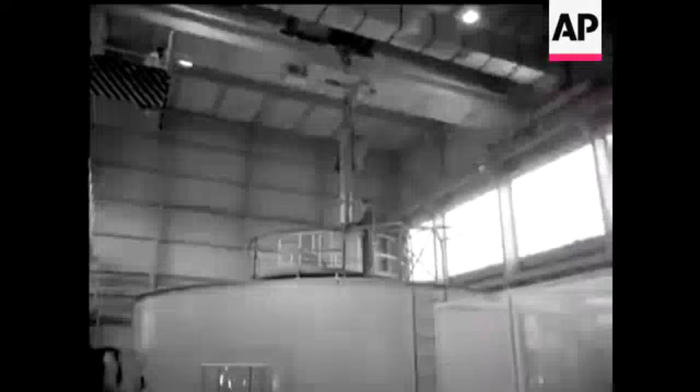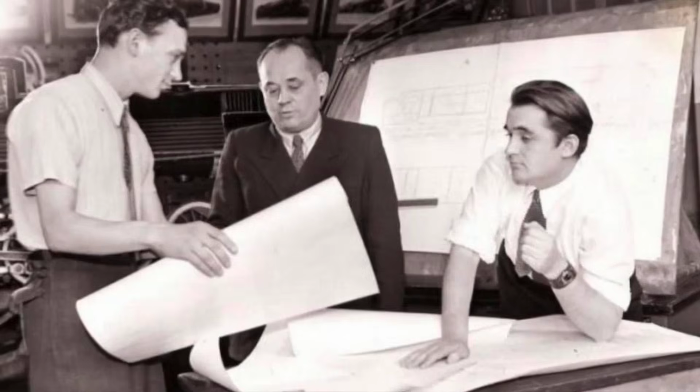The Atomic Energy Commission's public campaigns filled magazines and newsreels with visions of limitless, clean energy: reactors lighting cities, powering ships, and even propelling trains across the continent. This was an era when the boundaries of engineering seemed to dissolve overnight. In government labs and corporate boardrooms, nuclear power was treated not as a fantasy, but as the next logical step for nearly every form of transportation.

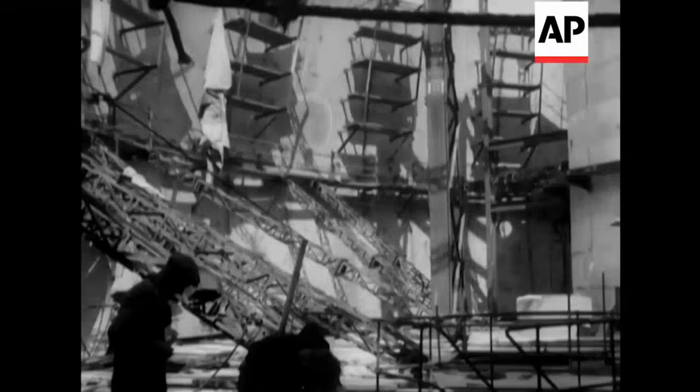The Atomic Energy Commission encouraged inventors to think big, offering technical guidance and, in some cases, access to subsidized uranium. Trade journals speculated about atomic-powered airplanes and merchant ships, while engineers from General Motors and Westinghouse began to sketch out the possibilities for railroads. Rail executives watched as nuclear submarines slid into the water, and the keel was laid for the NS Savannah, the world's first nuclear merchant ship.

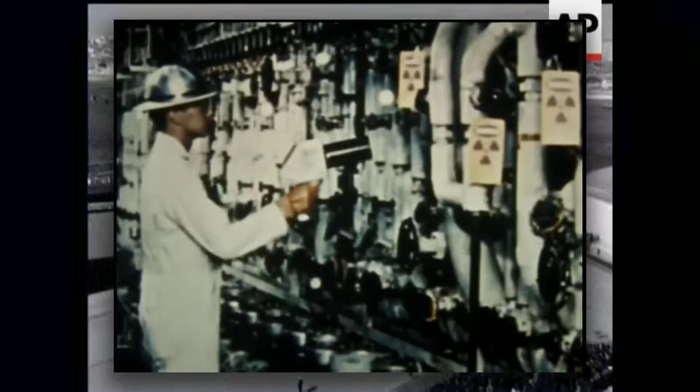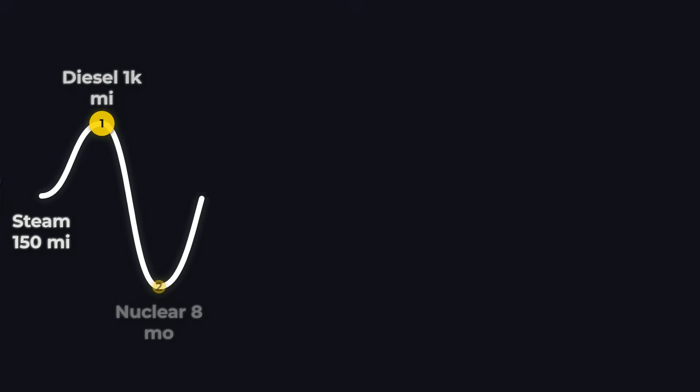The message was unmistakable: if reactors could operate safely beneath the waves and on the high seas, why not on steel rails? The Association of American Railroads, eager to be seen at the forefront of progress, lent its support to feasibility studies. The idea that a locomotive could run for months without refueling, immune to the price swings of coal and oil, fit perfectly with the spirit of the age.

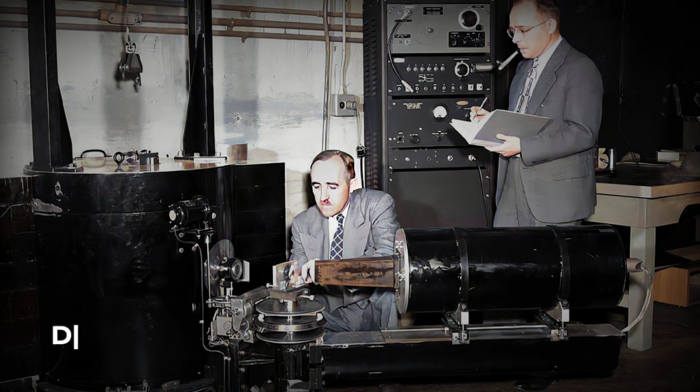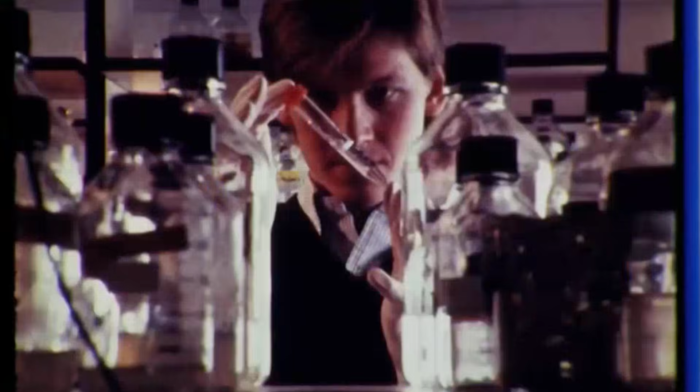In this climate of boundless atomic optimism, the stage was set for the X-12 and its promise to rewrite the rules of railroading. Dr. Lyle Borst, a physicist at the University of Utah, stepped forward as the most determined advocate for the nuclear locomotive. By 1951, Borst had gathered a small team of graduate students to tackle what seemed at the time a solvable engineering challenge: harnessing atomic power for rail.

He brought a reputation forged at Brookhaven and Oak Ridge, and his proposal quickly caught the attention of the Association of American Railroads, abbreviated AAR. The AAR saw in Borst's idea a chance to leap ahead of both foreign rivals and domestic competitors, so they agreed to sponsor a formal feasibility study.

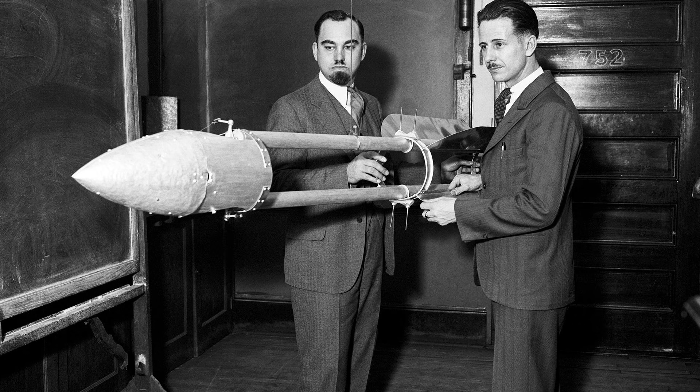General Motors and Westinghouse, both eager to stake their claims in the atomic future, offered technical assistance for the study. While neither company committed to building a prototype, their engineers contributed calculations and design reviews, lending the project a degree of credibility that pure academic speculation could not provide.

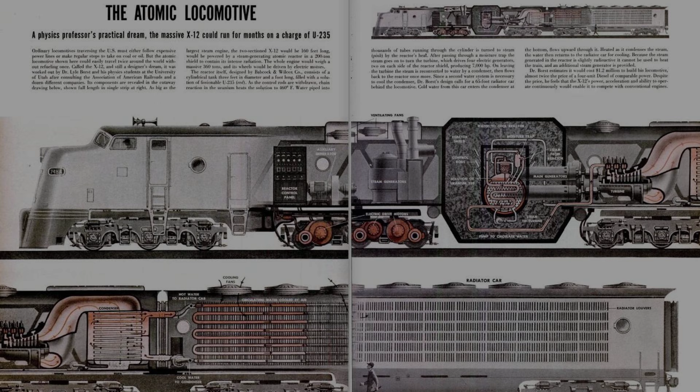The study, running from 1954 through 1957, became the most comprehensive attempt to map out how a nuclear-powered locomotive might actually work. Borst's concept was ambitious: a 160-foot articulated machine weighing 360 tons, designed to house a uranium-fueled reactor, a steam turbine, and electric traction motors capable of delivering up to 8,000 horsepower. The heart of the design was a 200-ton lead shield to protect the crew from radiation, and a dedicated radiator car to manage the enormous waste heat.

Babcock & Wilcox, already a leader in reactor technology, was tapped for the core design. Borst's team calculated that, with government-subsidized uranium, the locomotive could run for months without refueling, a tantalizing prospect for an industry dependent on costly and volatile fuel supplies.

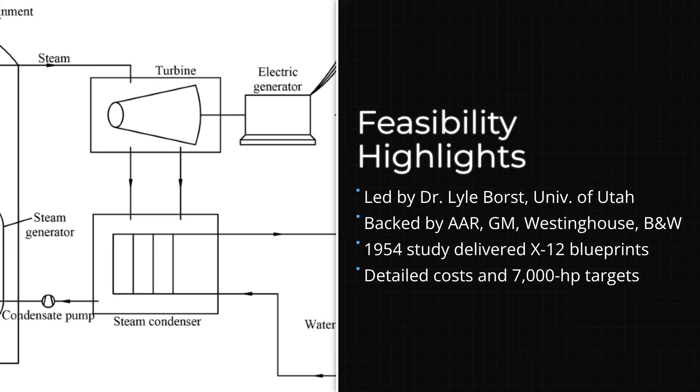Between 1954 and 1957, the feasibility study produced technical blueprints, cost estimates, and performance projections. Yet even as the numbers were tallied and the diagrams refined, the limits of the era's engineering began to surface. The X-12 remained a concept, but for a brief window it stood at the center of serious industrial debate, its backers certain that atomic power could transform the rails as surely as it had changed the world's navies.

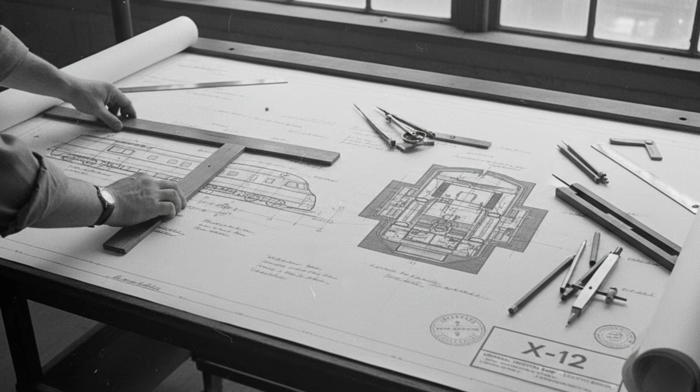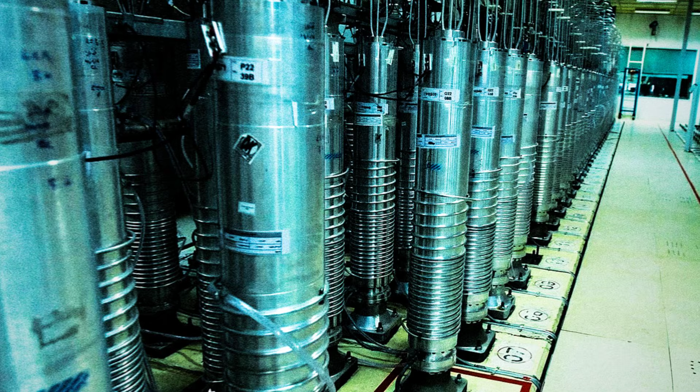The X-12's blueprint rested on a simple but radical premise: replace the diesel engine with a compact nuclear reactor and let atomic energy drive the train for months without stopping. At the core of the design sat a small, pressurized water reactor fueled by highly enriched uranium-235. The reactor's job was to heat water directly, producing high-pressure steam.

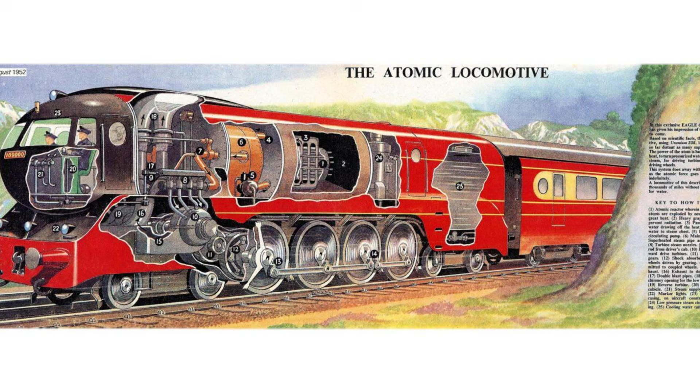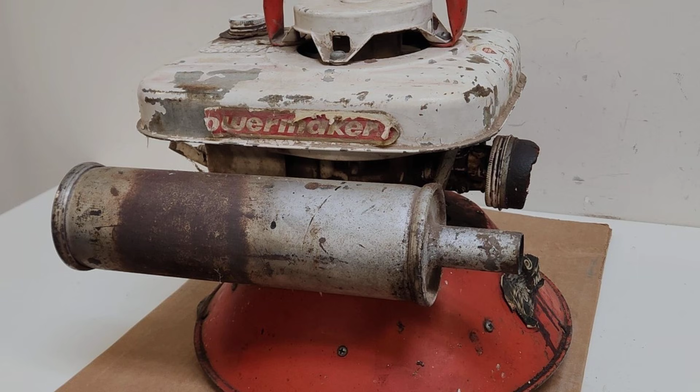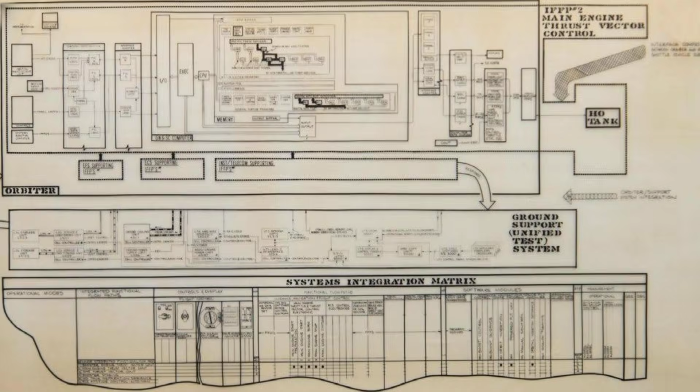This steam would then flow straight into a condensing steam turbine mounted just behind the shielded compartment. Instead of turning wheels mechanically, the turbine spun a set of 4 compact generators, each about 2 feet wide. Electricity from these generators powered traction motors mounted on 9 axles under the engine car, and 3 more under the radiator car, forming a turbine-electric setup reminiscent of the diesel-electric locomotives then conquering the rails. The entire power chain was laid out to maximize efficiency and minimize stops.

With about 11 pounds of uranium on board, the X-12 could, in theory, operate continuously for 2 to 3 months before requiring a refuel, an interval unheard of in conventional railroading.

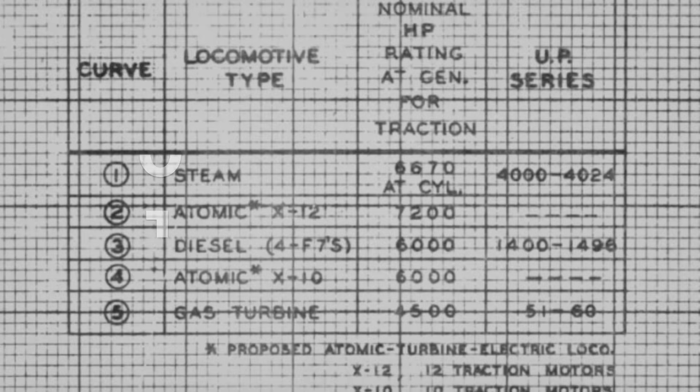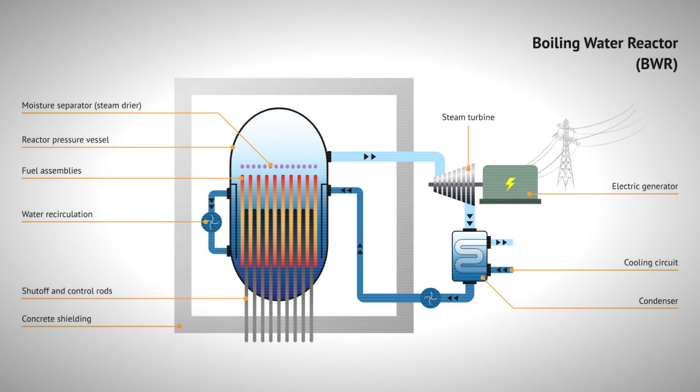The locomotive's normal output was rated at 7,200 horsepower, with the turbine itself capable of surges up to 11,000 horsepower for brief periods of acceleration. Because the reactor produced steam directly, there was no need for the water tenders or the massive coal bunkers that defined earlier steam giants. The radiator car, stretching 60 to 65 feet, handled waste heat with banks of fans and radiators.

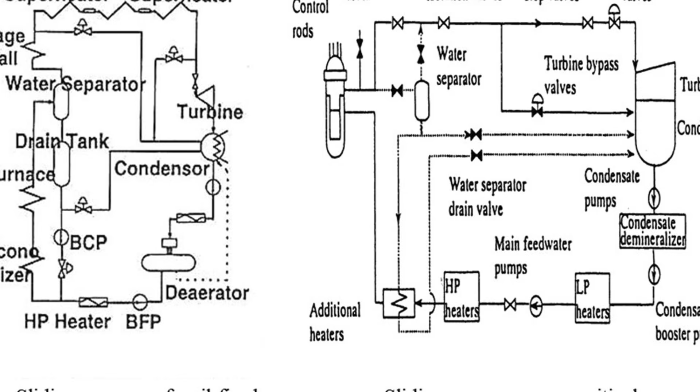Every engineering choice in the X-12's design aimed to harness the promise of atomic endurance. The direct steam cycle cut complexity and weight, while the articulated frame distributed mass across more axles. For a short window in the 1950s, it seemed plausible that a train could cross the continent without ever pausing for fuel, guided by nothing but the steady pulse of a nuclear core.

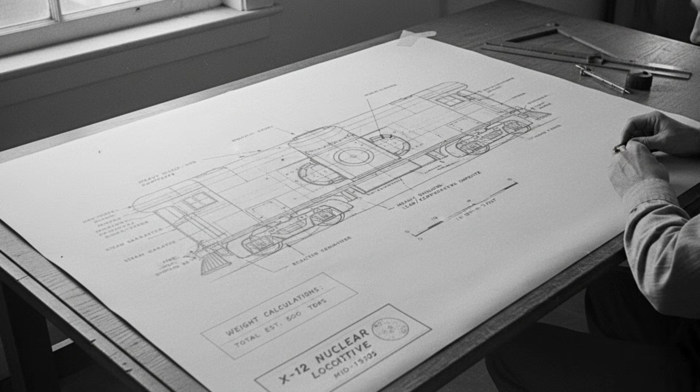Railroad engineering has always been a contest between ambition and the hard limits of physics. For the X-12, those limits arrived in the form of weight, specifically the enormous burden of radiation shielding. The locomotive's reactor core, though compact by nuclear standards, demanded protection from every side. Early calculations by Dr. Lyle Borst's team called for a lead shield weighing nearly 200 tons, more than the combined mass of 2 fully loaded diesel locomotives.

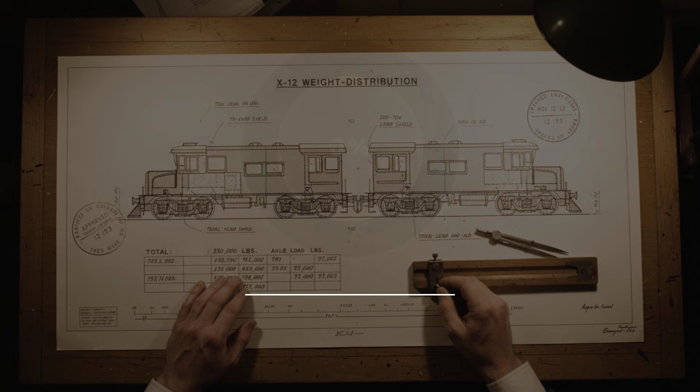This was not a luxury, but a necessity. Without it, the crew compartment would have been uninhabitable, and the risk to anyone nearby would have been unacceptable. The shield alone accounted for more than half of the X-12's total weight, which reached an estimated 360 tons across its 2 articulated sections.

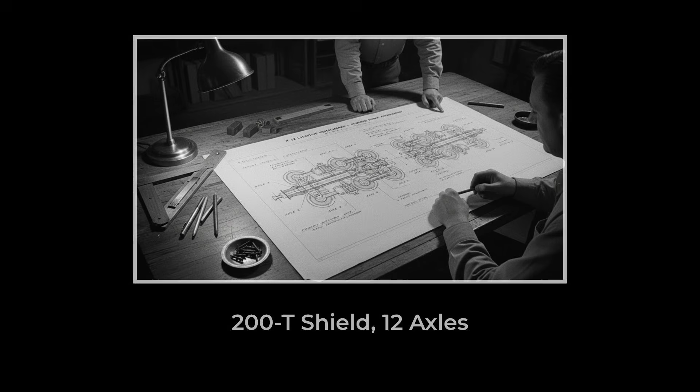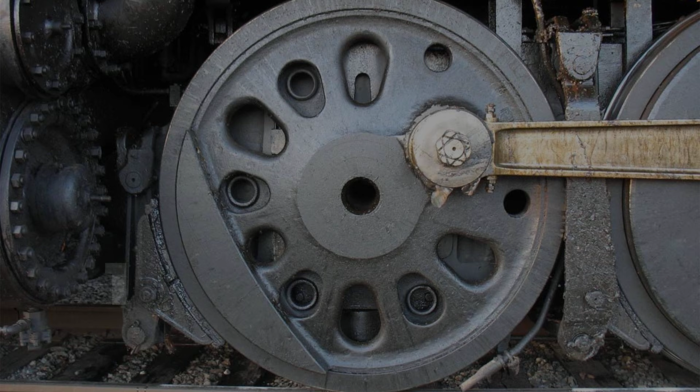This figure dwarfed anything then running on American rails. For comparison, a standard EMD F-7 diesel-electric tipped the scales at just 120 tons, spread over 4 axles. The X-12, at 3 times that weight, required 12 powered axles simply to distribute its load without crushing the rails beneath it. Even with this arrangement, axle loads approached the very edge of what North American mainlines could tolerate, about 30 tons per axle, a threshold that left little margin for error.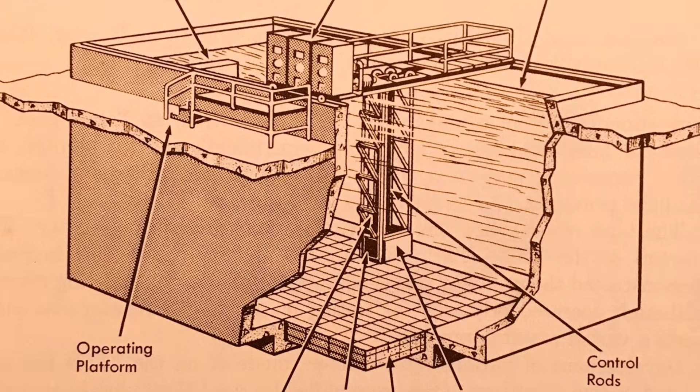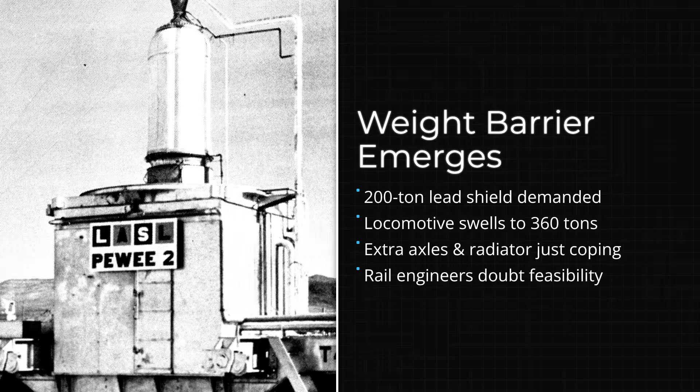This mass was not just a matter of heavy machinery. It was a direct consequence of the physics of radiation. Every inch of shielding added safety, but also added weight, pushing the design further from practical reality. The articulated frame, the extra axles, and the elongated radiator car were all attempts to spread this burden, but none could erase the fact that the locomotive's mass would stress bridges, tracks, and maintenance facilities far beyond their intended limits.

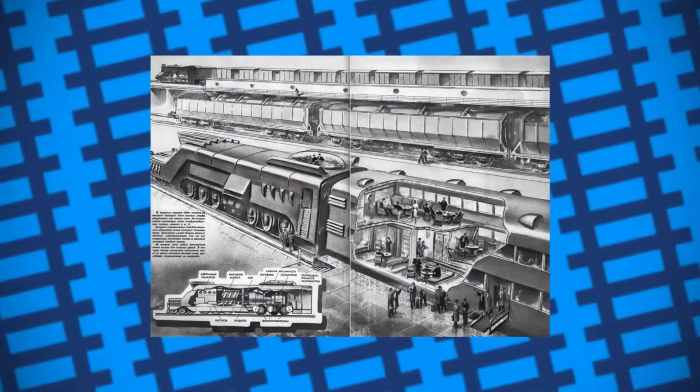For rail engineers, the numbers on the page spelled trouble, a train that could run for months without stopping, but might never be allowed to leave the yard. The promise of atomic propulsion collided head-on with the realities of steel and stone, and the X-12's blueprint began to look less like a roadmap to the future and more like a warning about the limits of technology.

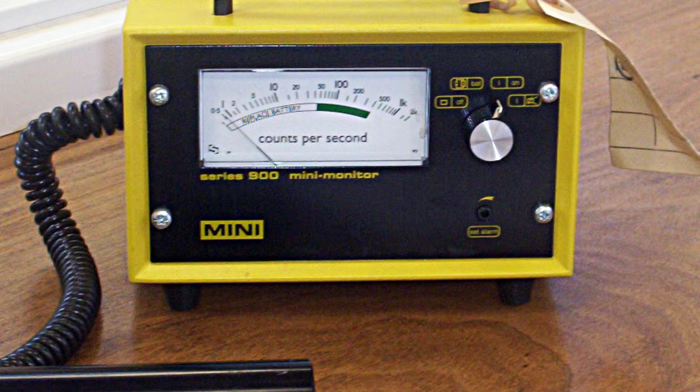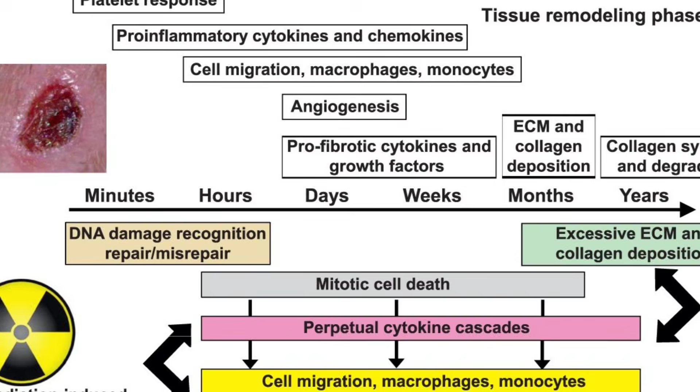Radiation is invisible, but its effects are measurable, and for anyone working near a nuclear reactor, impossible to ignore. In the 1950s, the Atomic Energy Commission set a strict occupational exposure limit, 5 rem per year, for whole-body radiation. This number was not arbitrary. It reflected a growing understanding that even low doses, accumulated over time, could damage tissue, suppress immune systems, or increase the risk of cancer. For the X-12, every design calculation had to answer the same question: how do you keep the crew and everyone nearby below that threshold?

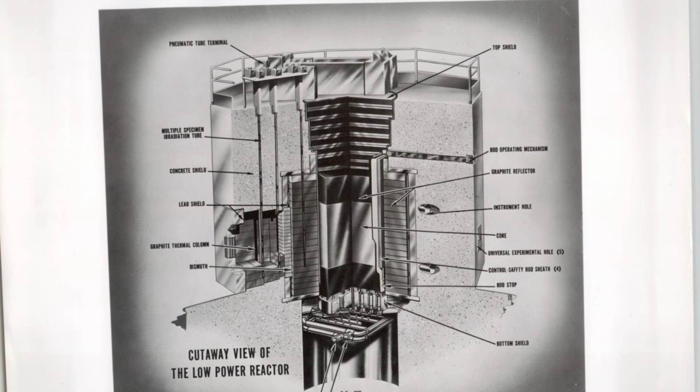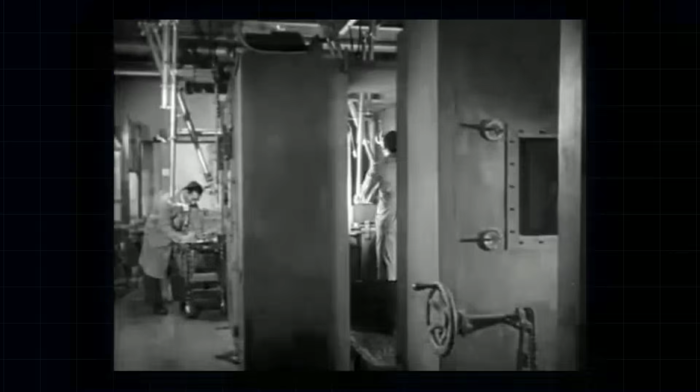Inside the locomotive, the reactor core would have emitted powerful gamma rays and neutrons, both capable of penetrating steel and concrete. The proposed solution was a 200-ton lead shield wrapped around the core and stretching between the crew compartment and the reactor vessel. But shielding was not perfect. Any gap, any flaw in the assembly, could allow radiation to leak into the cab. Even with the best materials, some exposure was inevitable.

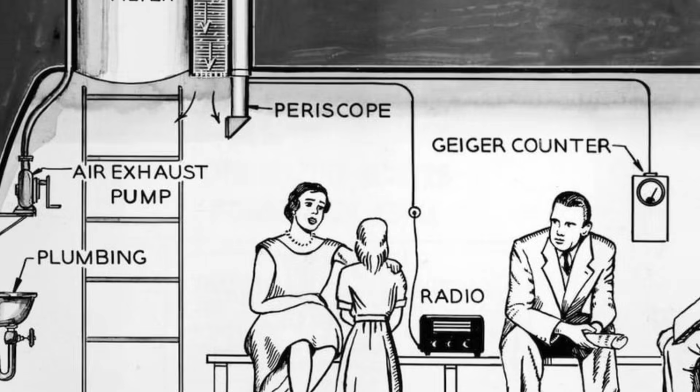Health physicists ran dose calculations for every scenario, including normal running, maintenance stops, and emergencies. Their models showed that at typical distances, a well-designed shield could keep crew exposure near, but not always below, the 5 rem annual limit. The closer you stood, the greater the risk.

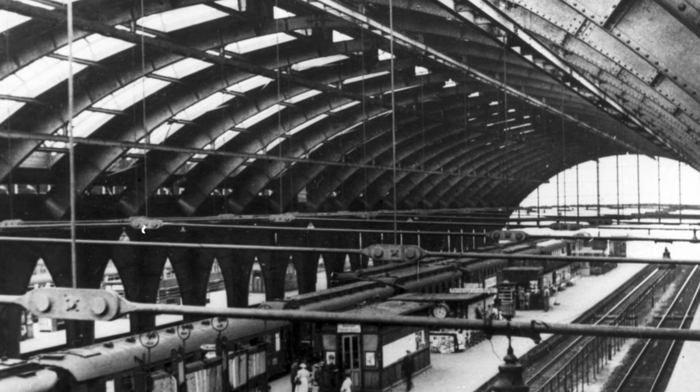The problem did not end with the crew. Railroads run through towns, past schools and neighborhoods, and along busy platforms. If the X-12 paused at a station or rolled slowly through a city, stray radiation could reach bystanders on the platform or people living near the tracks. The risk was not just theoretical. Even a small, persistent leak could add up over time, especially for workers who loaded cargo or serviced the train.

The 5 rem standard was meant to protect workers, but the public had no such buffer. This turned what started as an engineering challenge into a moral dilemma. How much risk could be justified in the name of progress? For the X-12, the answer was never clear enough to move forward.

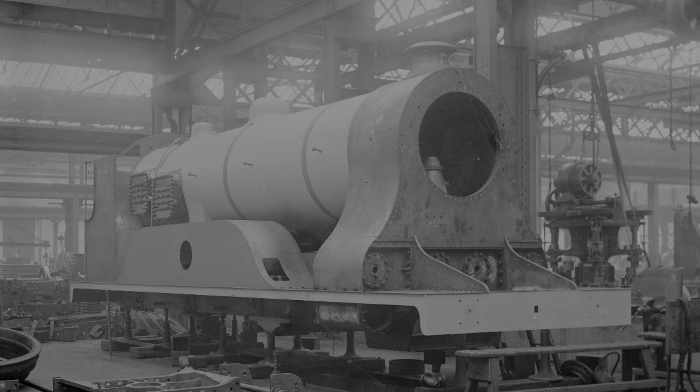Shielding a nuclear reactor on rails meant more than just piling on mass. It forced engineers into a maze of hard choices. Lead, dense and malleable, offered the best protection per inch, but it came with a staggering weight penalty. Borated water, used in some naval reactors, absorbed neutrons efficiently, yet it required heavy, leak-proof tanks and constant monitoring. Concrete, the standby for stationary power plants, was simply too bulky for a moving vehicle.

Each material promised safety but threatened practicality, and no blend could erase the fundamental problem. Every pound of shielding added to the locomotive's burden, pushing axle loads to the brink of what the track could bear.

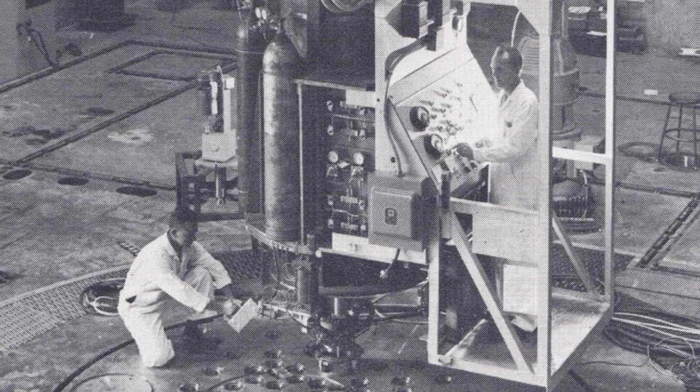The shielding dilemma spilled beyond the locomotive itself. Refueling and maintenance required a facility unlike any standard rail yard. Servicing a nuclear engine meant more than swapping out parts or topping off fluids.

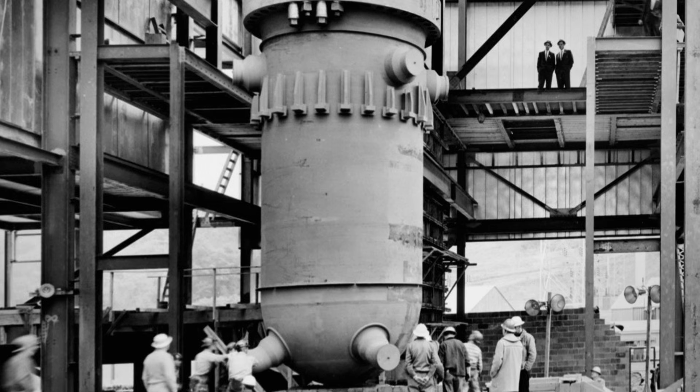The entire reactor compartment, still hot with residual radioactivity, would need to be handled inside a hardened depot modeled after the containment buildings of power plants. These depots had to be remote, with thick walls and controlled access, equipped for everything from fuel transfer to shield inspection.

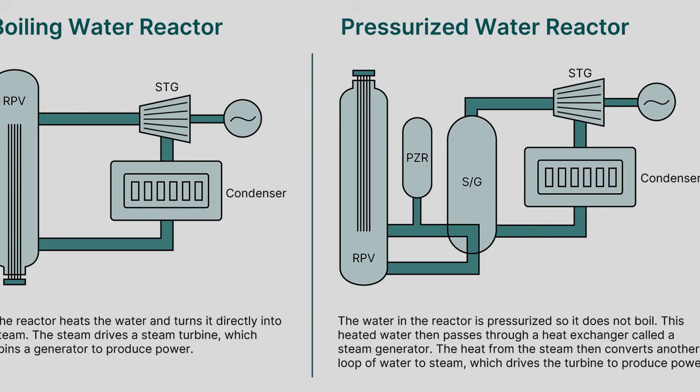Every tool, every surface, had to be monitored for contamination, and spent fuel demanded secure storage until it could be safely transported away. Routine maintenance, a daily reality for diesel engines, became a logistical puzzle for the X-12. The direct cycle design meant that turbines and piping exposed to radioactive steam could not be serviced in the field. Components would either be left untouched for years or swapped out entirely by teams trained in radiation safety, working behind barriers, or with remote manipulators.

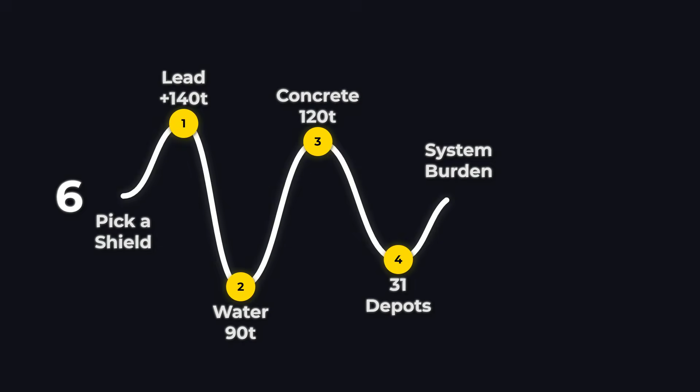Even minor repairs required planning that rivaled a nuclear plant's outage schedule. This system-wide complexity changed what it meant to operate a locomotive. The X-12's promise of endless range hit a network of specialized depots, hazardous material protocols, and a maintenance regime that stretched far beyond the rails.

Shielding was not just a technical detail, it was a burden that rippled outward, touching every aspect of railroad operations and raising the stakes for what could happen if anything went wrong. A nuclear locomotive derailing at speed posed a nightmare scenario that engineers struggled to quantify.

Impact modeling from the period suggested that, at 60 miles per hour, the forces unleashed in a major crash could compromise the integrity of the reactor vessel, especially if the train struck a bridge abutment or jackknifed into a ravine.

While the X-12's design called for a thick, 200-ton lead shield and an automatic reactor shutdown on collision, containment was never absolute. Early estimates placed the probability of a catastrophic breach in a high-speed derailment somewhere between 1 in 1,000 and 1 in 10,000, a low number, but not zero.

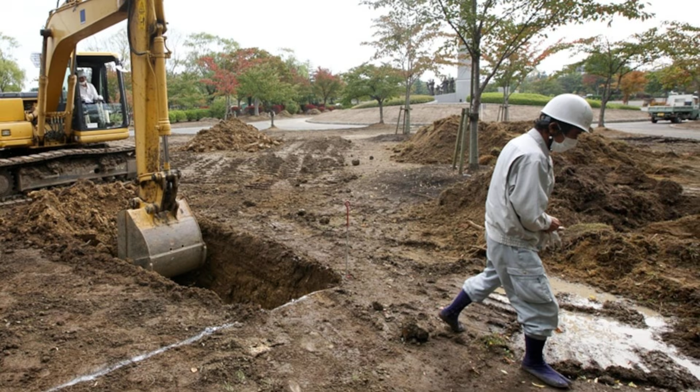In the event of a rupture, radioactive steam and contaminated water could be vented directly into the environment, spreading across trackside neighborhoods and farmland. Emergency planners calculated that cleanup would require cordoning off miles of track, evacuating entire communities, and removing tons of contaminated soil, an operation measured in years, not weeks.

The sheer scale and cost of such a disaster forced railroads and regulators to confront the unthinkable. One accident could turn a routine freight run into a radiological crisis, stretching far beyond the rails.

By 1954, the numbers on the X-12's balance sheet told a story no rail executive could ignore. The projected cost to build a single nuclear-powered locomotive stood at $1.2 million, twice the price of a 4-unit diesel set with similar hauling power.

For railroad chief financial officers, that was only the starting point. Each X-12 would demand a custom-built reactor core, a 200-ton lead shield, and a specialized maintenance regime, costs that ballooned far beyond the sticker price.

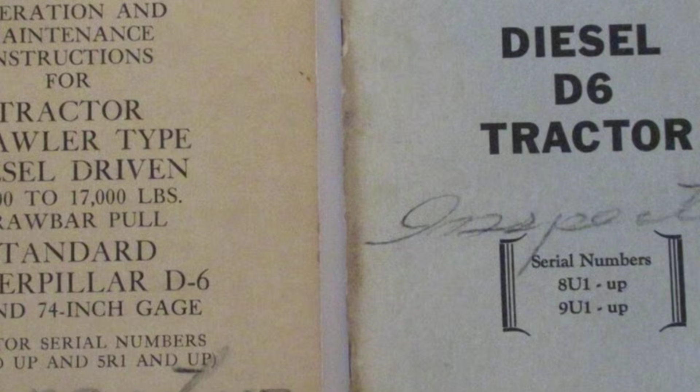Operating expenses added another layer of uncertainty. While uranium-235 fuel was theoretically subsidized, its price was both classified and unstable, and the logistics of sourcing and handling nuclear material introduced expenses that no diesel fleet manager had to consider.

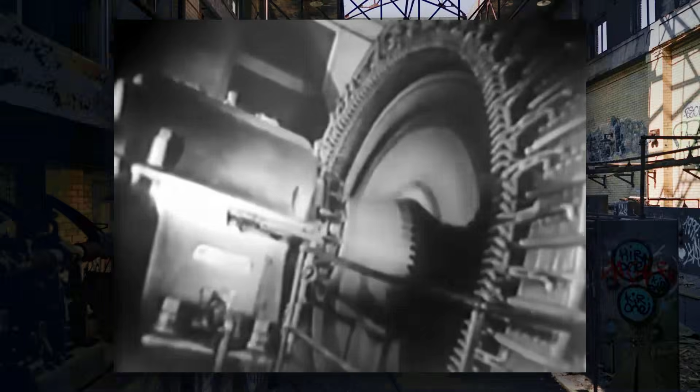Insurance companies, faced with the prospect of a mobile reactor crossing state lines and running through cities, balked at providing coverage. Premiums, where quoted, approached sums that would wipe out any long-term savings from reduced refueling. Even before the first prototype was built, the X-12's financial burden had outpaced any promise of atomic efficiency.

For a railroad industry already investing heavily in proven diesel technology, the nuclear locomotive was simply a bet too risky to place. By the late 1950s, the American railroad industry was already in the midst of a sweeping transformation.

The introduction of the EMD-FT diesel locomotive in 1939 had set off a wave of dieselization that moved faster than anyone predicted. By 1955, diesel electrics hauled more than 90% of all rail freight in the United States.

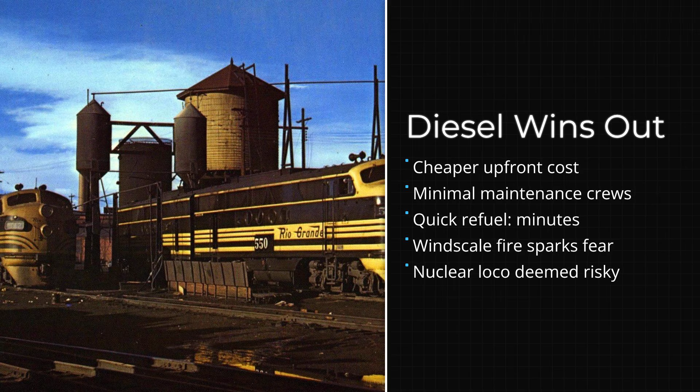Railroads found that diesel units cost less to buy, needed fewer mechanics, and could be refueled in minutes rather than days. The numbers left little room for debate. A 4-unit diesel set delivered the same horsepower as the X-12, but at half the price and a fraction of the complexity.

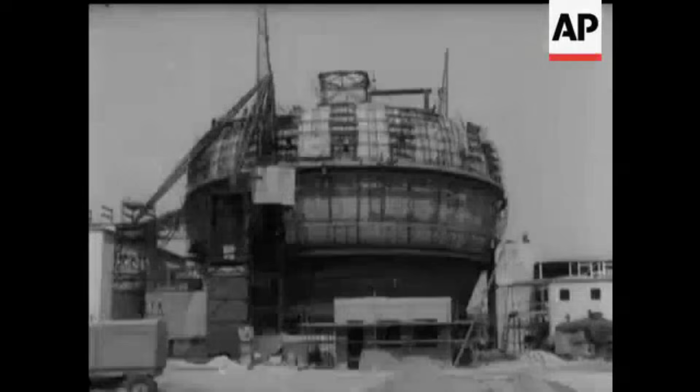At the same time, public attitudes toward nuclear technology began to sour. The 1957 Windscale fire in Britain, the worst nuclear accident of its era, dominated headlines and stoked fears of radioactive fallout. Newspapers ran editorials, warning of the dangers of mobile reactors, and community groups petitioned regulators to keep atomic engines away from populated areas.

The combination of proven diesel reliability and a growing tide of anti-nuclear sentiment made the prospect of a nuclear-powered locomotive less a vision of progress and more a public relations liability. Regulators and insurers took notice, and the final barriers to adoption became insurmountable, not just technical or economic, but social and political as well.

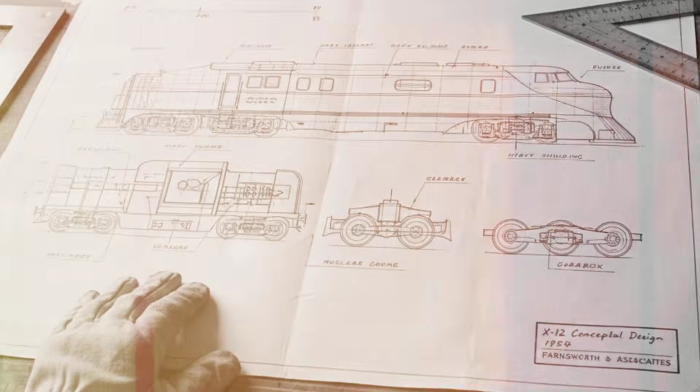Nuclear-powered trains never left the drawing board, but their story still echoes today. As clean energy and infrastructure debates intensify, the balance between technological ambition and public safety remains unresolved.

Every bold solution faces old questions. What risks are we willing to accept for progress? The future of transport depends not just on what we can build, but on what we choose to trust.